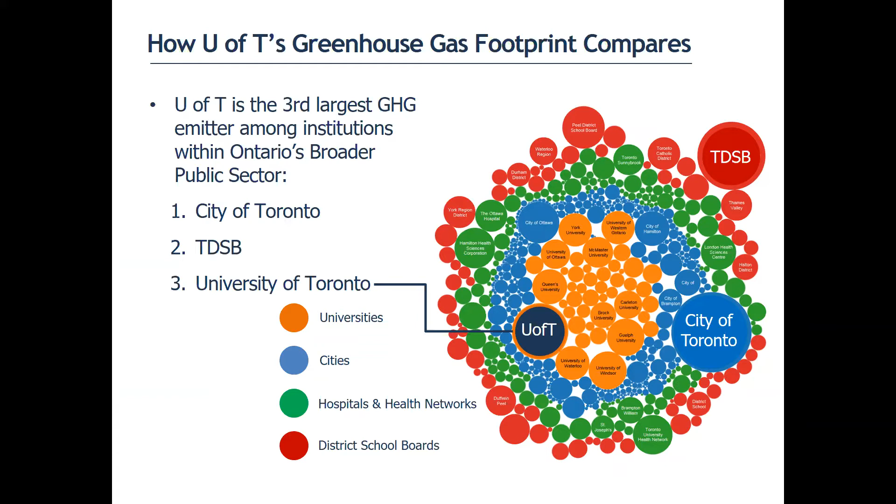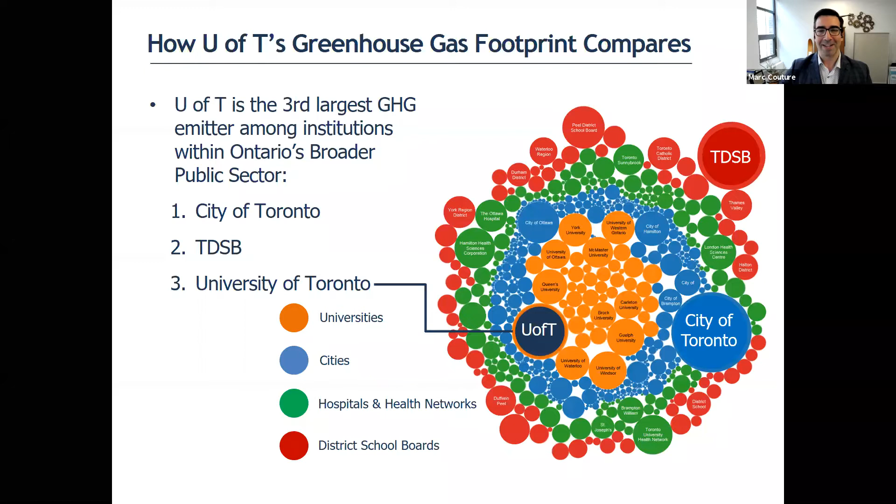In terms of our carbon footprint, the U of T is the 3rd largest GHG emitter amongst institutional emitters within Ontario's broader public sector, which is sort of a dubious bronze medal for us, and we're trying to very actively hand over that bronze medal to someone else. When you compare the U of T's greenhouse gas footprint, our reduction target by 2030 of 59,000 tons alone is larger than the total annual emissions of any other Ontario university. So I think that's important for context.

And while we are efficient and we strive to be even more efficient, we still have a very significant footprint due to our scale. We emit more than many local auto manufacturing plants and other industry players. If you see here, we have Sanofi, Honda, Toronto Pearson Airport, Ford, GM, Toyota, and you see us at the bottom.

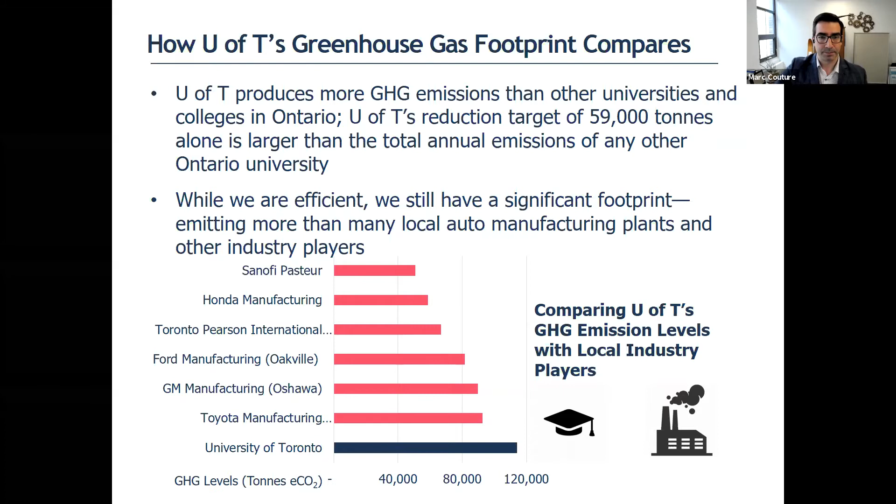We've set a commitment at U of T to reduce our GHG emissions by a minimum of 37% by 2030, and this is based on a 1990 GHG baseline. I think that 1990 level is important, and I'll circle back to that in a minute. We're also part of the University Climate Change Coalition through Second Nature. We joined in 2018, along with 19 other universities in North America that have made the same commitment. Our low carbon action plan is a response from university operations to achieve our commitment on climate change.

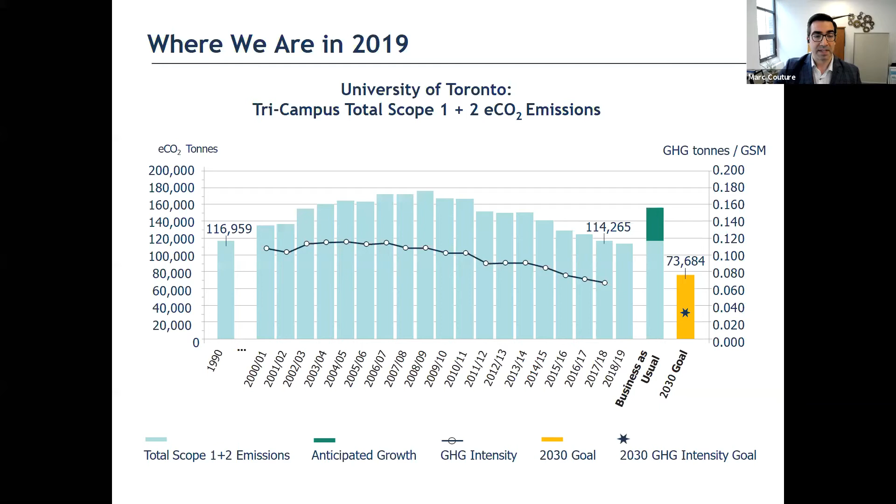Going back to our baseline here of 1990, the reason this is so significant is that our emissions actually rose quite a bit between 1990 and today. So if we were basing our baseline more on a 2005 or a 2010, this would reflect closer to a 65 to 70% reduction. And this is also for us, net of growth. So it does make a big difference for us referencing 1990.

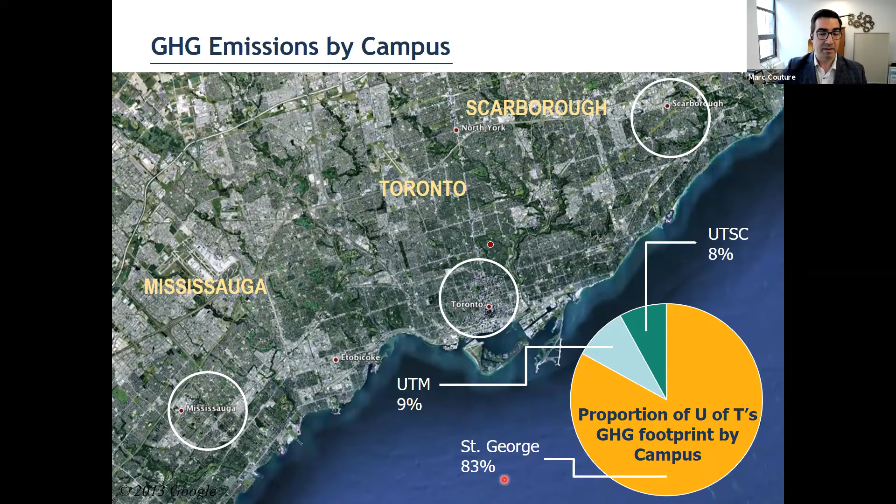To look at the bigger picture here, we have our 3 campuses: Mississauga, Scarborough, and St. George in downtown Toronto. You can see the relative proportions of the GHG footprint for each campus, with St. George taking the lion's share of those emissions at 83%.

Our low carbon action plan focuses on a strategy or framework where we're looking to tackle 3 buckets: production, distribution, as well as consumption on the demand side. And we follow several principles for this. The first principle, of course, is to focus on reduction, a conservation-first approach, because the cleanest and cheapest energy is the energy we do not consume.

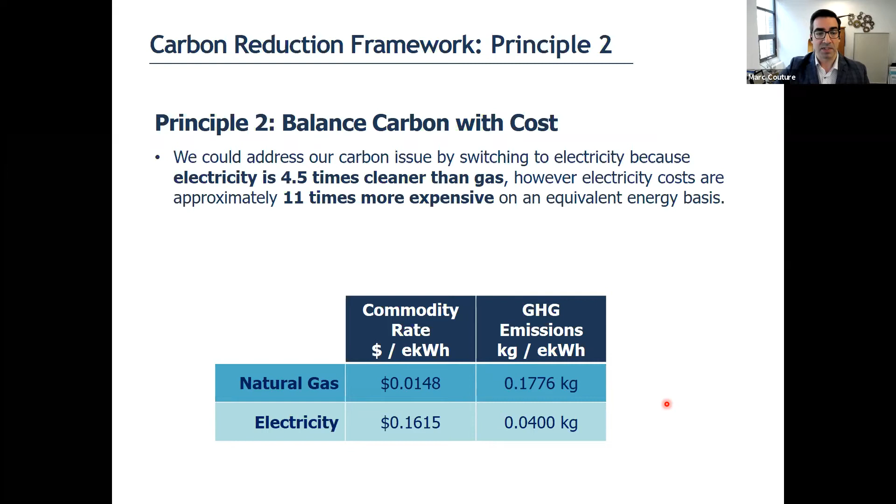Principle 2 is to balance carbon with cost. We could address our carbon issue largely by switching to electricity because it's 4.5 times cleaner than gas. However, with a Class B rate, it's actually 11 times more expensive. So this obviously has to be balanced in a responsible manner to decarbonize our campus.

Principle 3 is to also try and go beyond our own assets, to reach beyond our assets. Our district system supplies some of the federated colleges and also external clients, and approximately 12% of our emissions come from assets we do not directly own or influence. So we have to work collaboratively with these external partners to try and reduce our emissions overall.

We also, as Principle 4, want to foster innovative solutions. We definitely want to leverage the campus as a living lab model to foster partnerships with our academic community and achieve carbon reductions. We also want to develop external partnerships to implement innovative solutions to our carbon challenges.

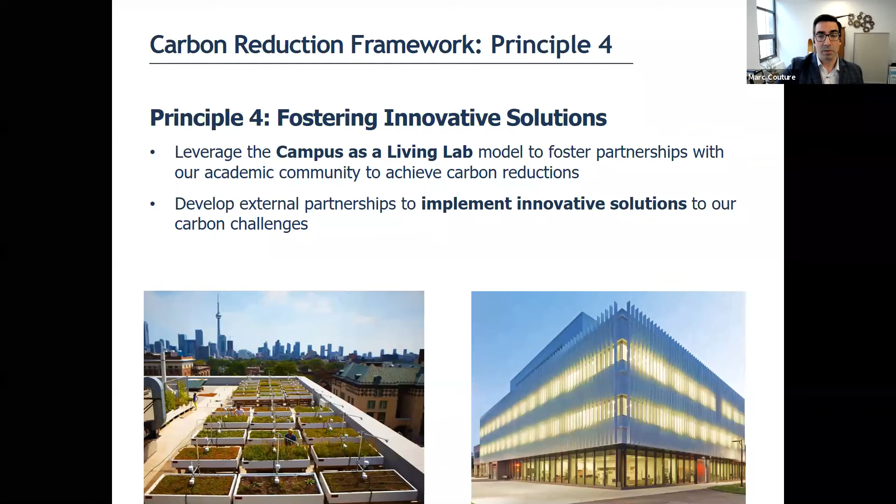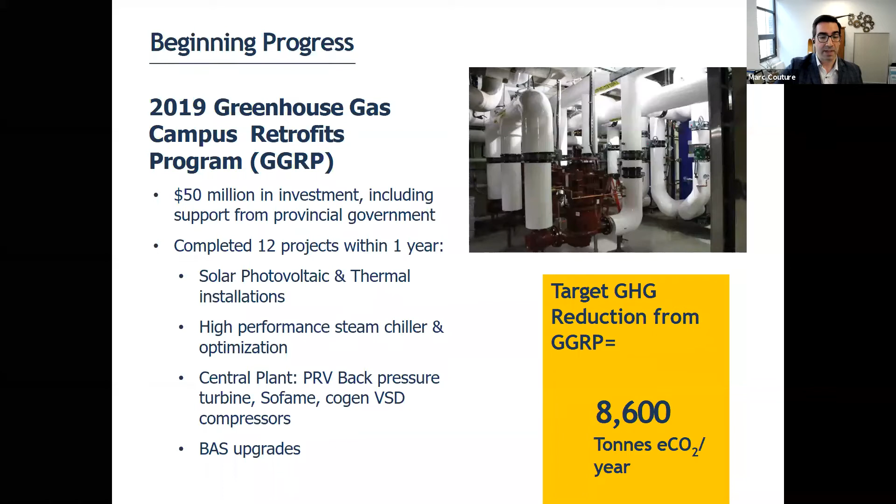If we look at our framework here, we'll start with the production end of things, and we'll see how we plan to achieve our targets.

The first project here is ongoing currently in King's College Circle in the heart of our front campus, our historic core. We're currently drilling over 350 boreholes to a depth of over 850 feet, and this will help us achieve a reduction in our GHG emissions as it supports the energy from our central heating plant.

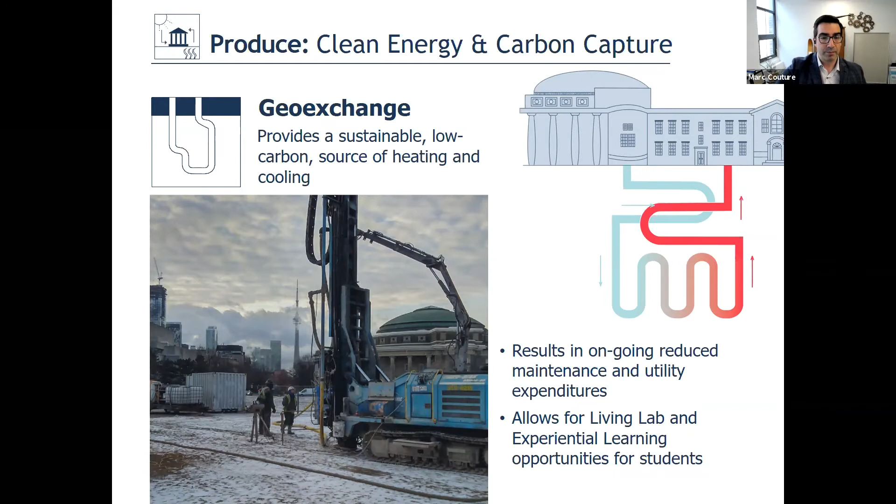We're doing geothermal on all 3 campuses. The King's College Circle example I just spoke about is targeting a 15,000 ton reduction, while geothermal at the other 2 campuses, UTM and UTSC, combined give us a total of 16,465 metric tons of reduction annually.

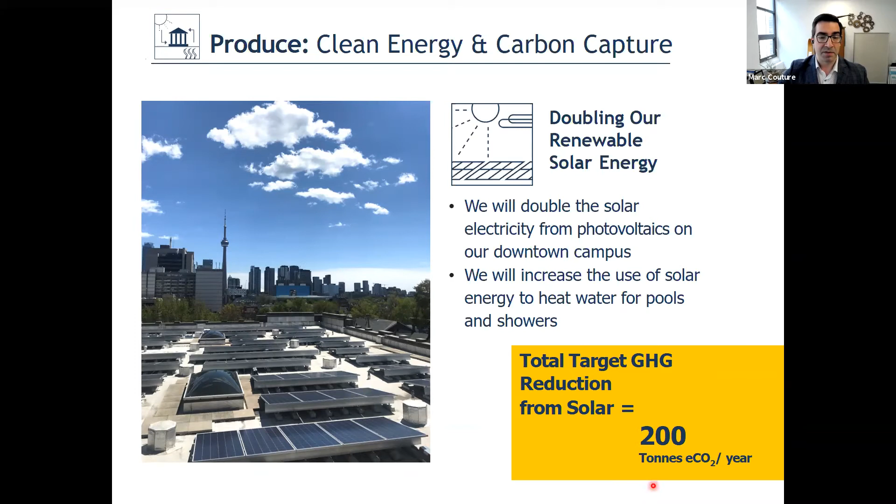Also under the production category, we're aiming to double our renewable solar energy on our St. George campus, as well as the Mississauga and Scarborough campuses. While reducing electrical consumption doesn't have as huge of a GHG impact, this will still give us a minimum of 200 tons annually and support our goals towards renewable energy.

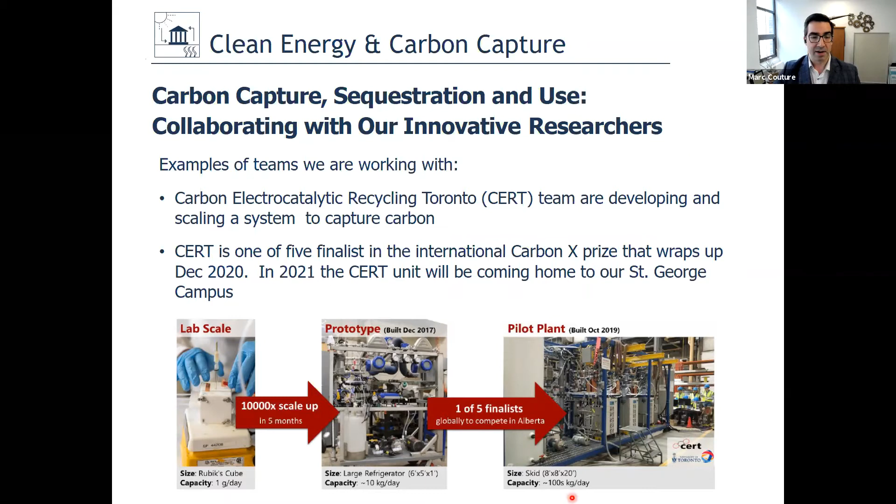Another innovative solution is that we're looking to collaborate with our campus innovators on carbon capture and sequestration. We have a team called CERT, led by Professor David Sinton and Ted Sargent, and they've been competing in the Carbon X Prize. They've successfully gone from lab scale up to a prototype scale, and we're one of the 5 finalists as part of the Carbon X Prize. They're just returning home to the U of T campus now with their skid, and we hope to implement this even at a larger scale as part of our decarbonization efforts.

If we look to the second category here in terms of distribution, we're looking to leverage our 100-year-old district energy system and target specific improvements to try and reduce emissions further by about 2,200 tons per year.

Our central plant is a key piece of this because it does distribute and provide heating to over 80% of our campus, and also over 20% of our electricity needs. So tackling the central plant efficiency is key to our strategy here.

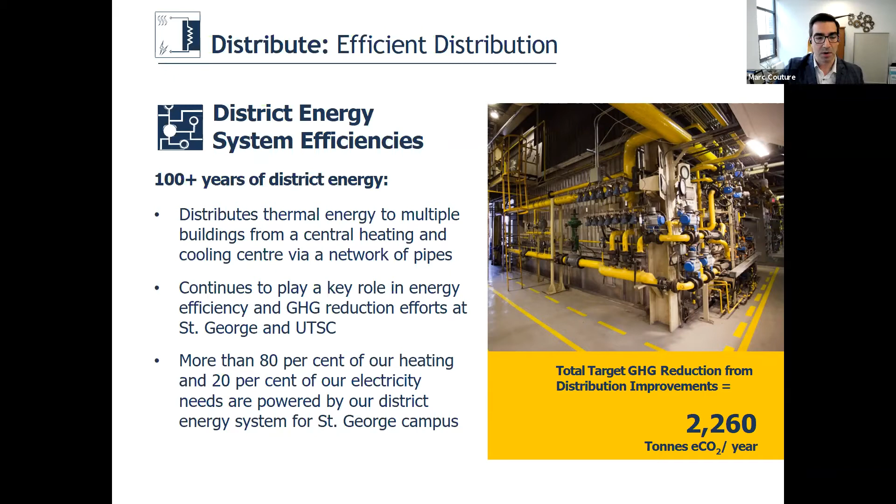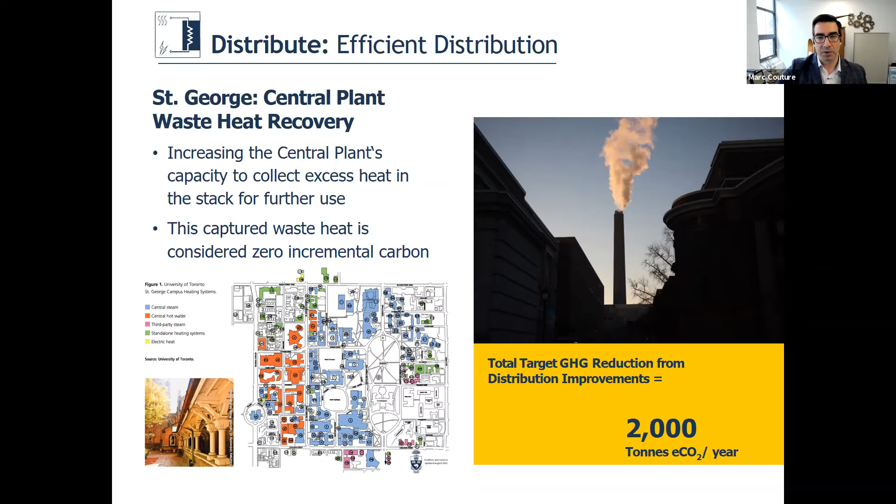One of the pieces here is the central plant waste heat recovery. We want to increase the capacity and the amount of waste heat that we can recover from our central plant and distribute this to adjacent buildings that can consume low temperature hot water. This component here should give us roughly 2,000 tons.

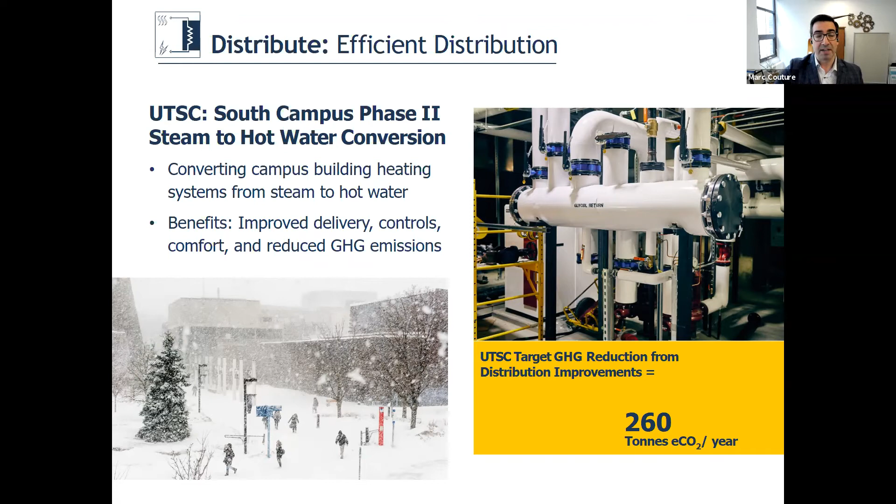At UTSC South Campus Phase 2, they're doing a steam to hot water conversion, converting campus buildings from steam to hot water. Benefits here obviously include improved delivery, controls, comfort, and reduced GHG emissions. They're hoping to achieve 260 tons per year with some of these steam to hot water conversions.

When we look at the consumption side, this is really your demand side or your building side, and it is critical as part of our overall plan.

Here you can see for the St. George campus, we look at the GHG intensity of our buildings. Right now we're at an average of 69 kilograms CO2 per square meter as an annual average, but to achieve our target, we really need to be at 32 or lower. So we're looking at more than halving this intensity right now.

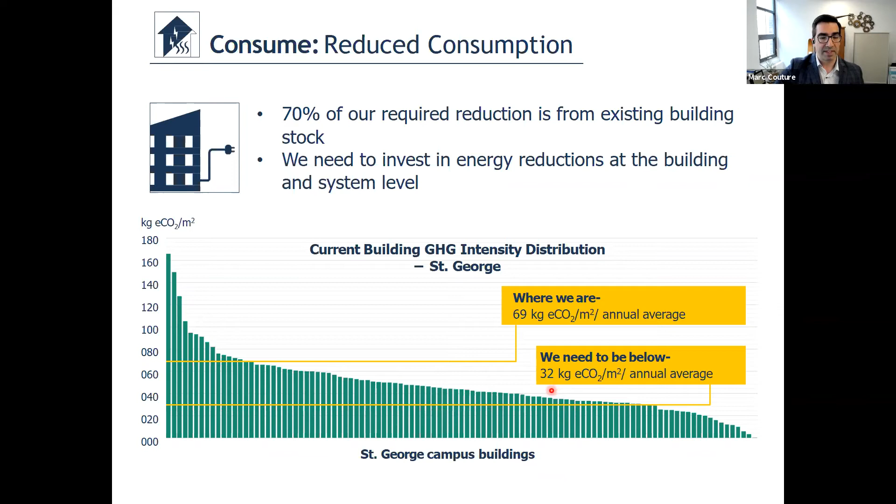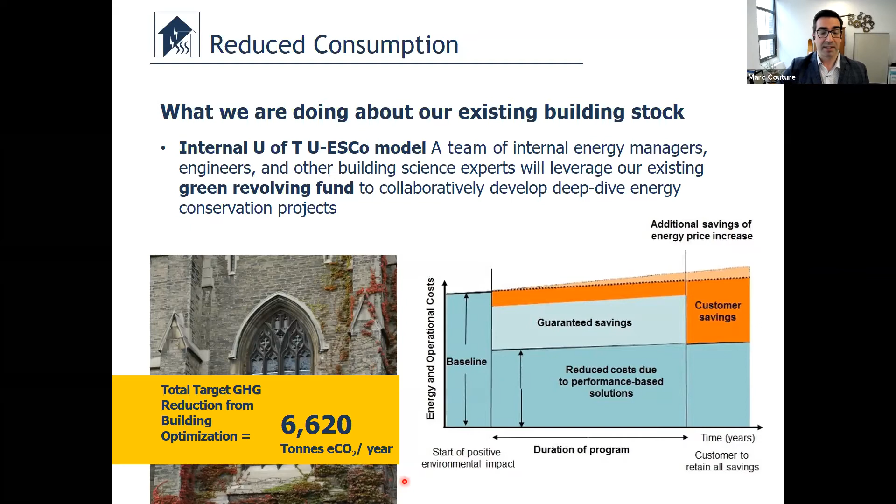One of the ways we're planning on achieving this is through our deep energy retrofit program. Internally, we have a group called the U-ESCo team, comprised of people from my office of sustainability, the operations and utility folks, finance, as well as property management. We're working collaboratively to identify deep energy retrofit projects, which can be funded in part by our revolving fund, as well as through our deferred maintenance budgets, to really affect deep transformational change. Through this program, we're looking to achieve a minimum of 6,600 tons of reduction annually.

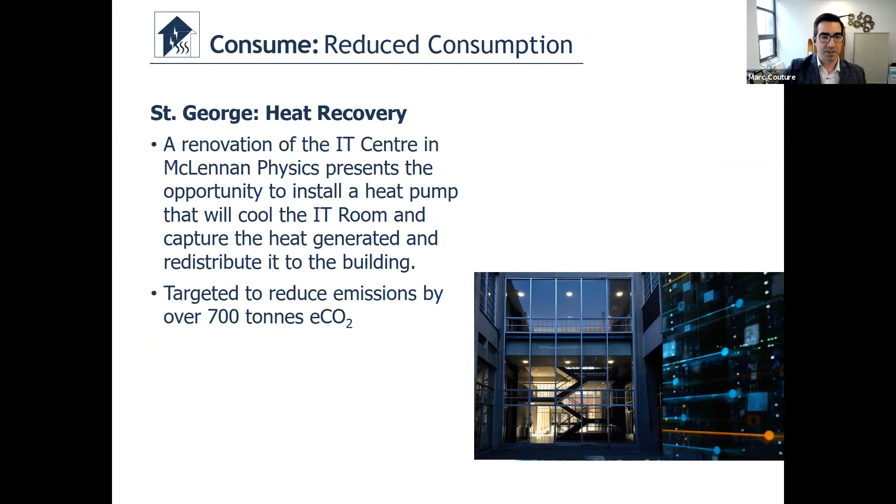On the demand side, we're also looking at opportunities for internal heat recovery. We have a project at our McLennan Physics building where we're going to use a heat pump to capture the heat generated by an IT data center and use that to offset heating requirements for the overall building. We're calling this our computational boiler, targeted to reduce emissions by 700 tons annually.

Another key pillar in our strategy is our new performance standards, launched in fall 2019. We're mirroring the Toronto Green Standard requirements for building performance with our own version internally at U of T, combining best practices from a number of standards and codes, including LEED, the TGS, the WELL standard, and different ASHRAE standards.

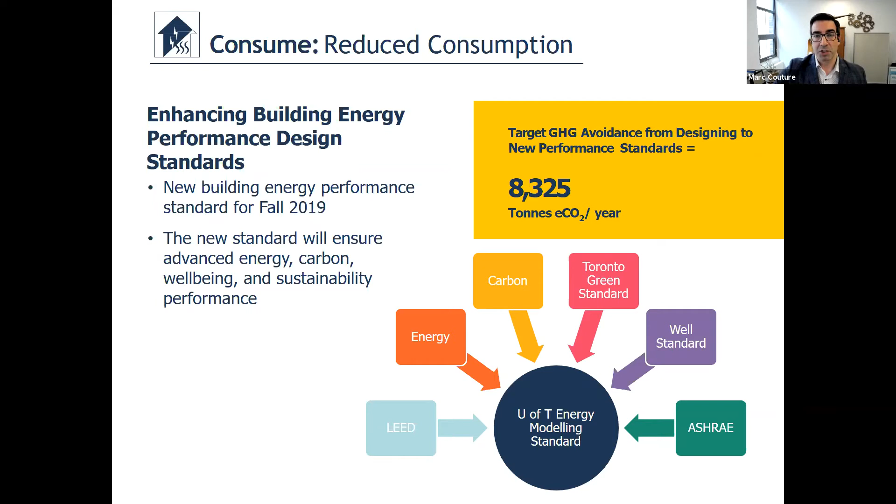We're essentially requiring all new construction, major renovations, and minor renovations on our campus to meet a very stringent target in terms of overall energy use intensity, GHG intensity, and thermal energy intensity. This will go a long way toward mitigating the impacts of growth on our campuses, and ensuring every dollar spent through deferred maintenance and operational budgets is aligned with our long-term vision and targets.

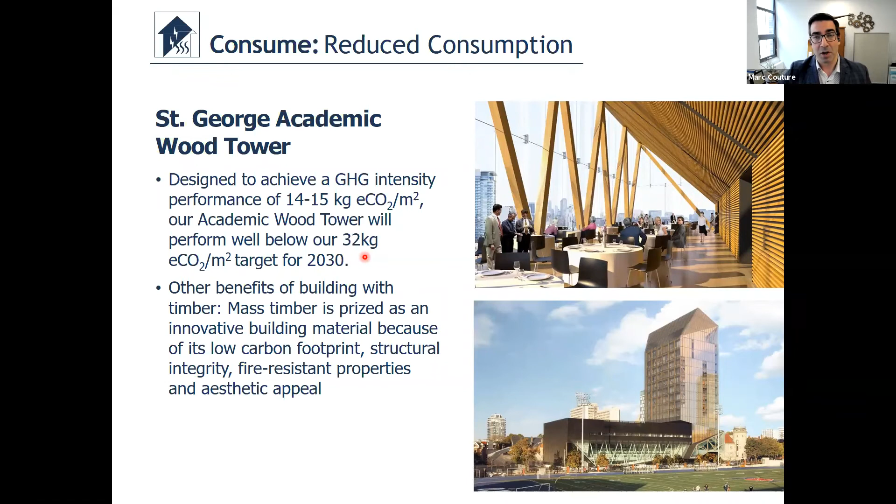Another example is our St. George Academic Wood Tower. This is designed to achieve a GHG intensity performance of between 14 and 15 kilograms per square meter. Recall we were looking to be well below our 32 kilograms. This is another example of how our performance standards help mitigate the impacts of growth.

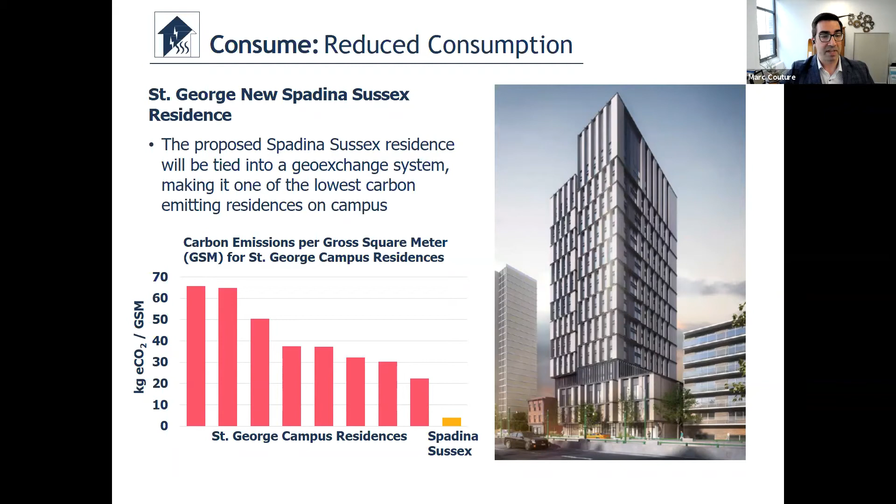Another example of demand side work is lighting conversion. We currently have one project tackling LED lighting conversions. Lighting is one of those things where as soon as you've done a conversion, there's new technology and you can start all over again, specifically because these projects typically have very low paybacks, making them very attractive for reducing energy consumption as well as GHG emissions.

We're currently replacing roughly 35,000 lights on campus to LED as part of phase one, which is ongoing, and hoping to launch a phase two to replace even more bulbs, for a combined replacement of over 75,000 bulbs from now till September. The result should be a minimum of 1,000 tons reduction per year.

Carbon stock and sequestration: U of T properties including St. George, UTM, UTSC, Hart House Farm, and Koffler Scientific Reserve at Jokers Hill and Gull Lake have a significant number of forests and trees that have been capturing and storing carbon for decades. We're doing research to calculate the number of trees and the capacity for sequestration, and hope to deploy active forest management to generate a net reduction of close to 1,100 tons per year.

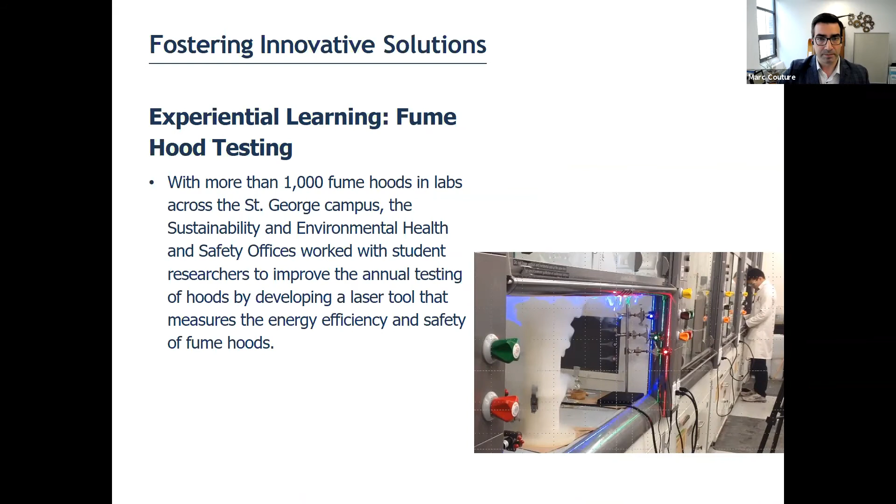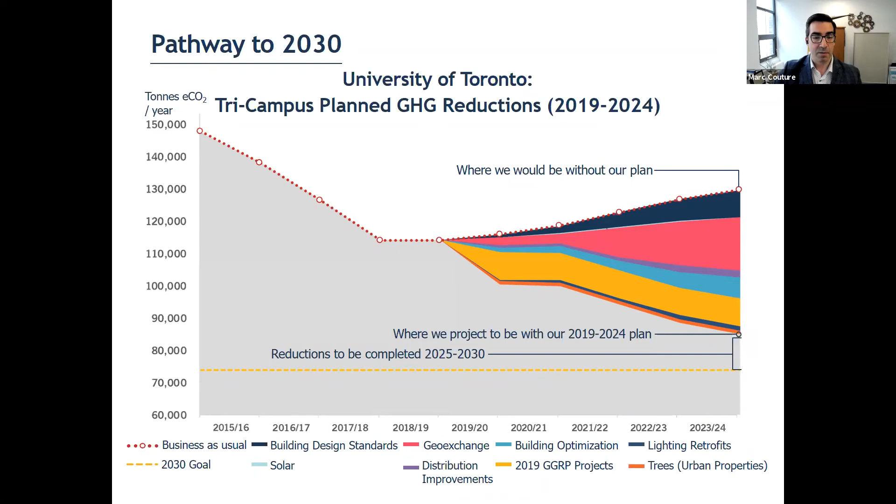If we look at our pathway to 2030 at a glance, you can see that design standards play a big piece in mitigating growth, because this was where our growth would be without the standards, so it substantially mitigates the impacts of growth. Our geo exchange, shown here in pink, will have a big impact as well, providing a 15,000 ton reduction at St. George. And if you look at the rest here, the GGRP project we just finished, and building optimization, you can see how we plan to get to our overall 45,000 ton reduction.

Another really significant piece to this is how we're measuring our carbon reduction. We've made a commitment to reduce 80% by 2050, but this is absolute - net of growth, and without using any offsets. The last 20% will be U of T owned offsite generation for renewables, not third-party offsets. This is a little different than how some of our peers are doing it.

I think this does make it quite challenging, also in light of the fact that we're looking at probably about 90% campus growth from now till 2050. So those performance standards are going to come in, and be very much a key piece towards 2050.

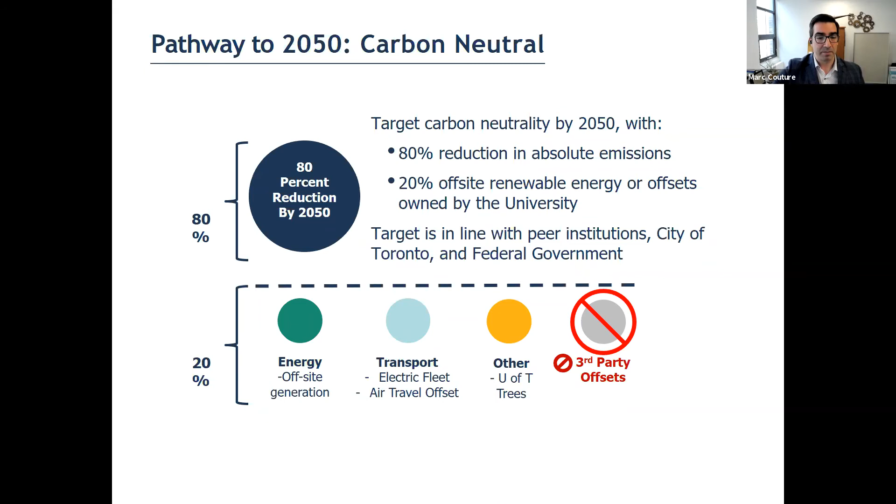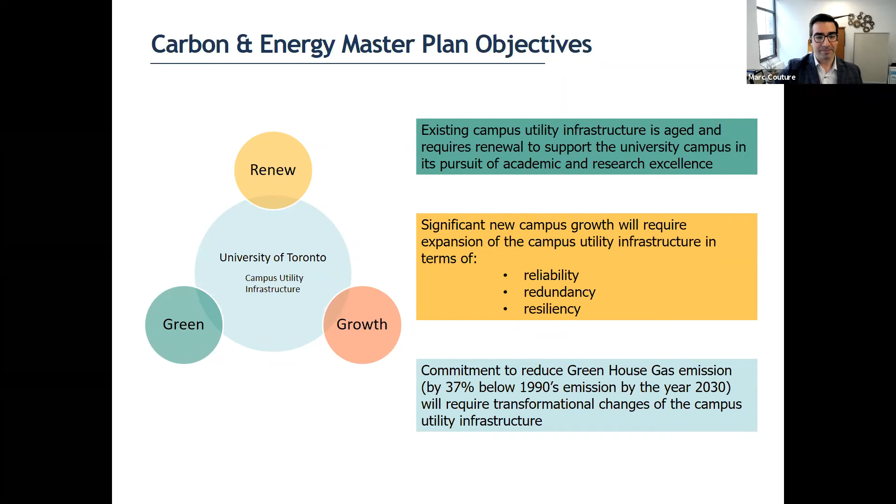That's all I have for you this afternoon.

Perfect, thank you so much Marc, and Mike, we'll invite you back to join us for the question and answer period now. Marc, I have to say watching your slide presentation, there are some really good looking buildings at U of T. I can't wait to get back to the city to come check them out in person and do some Instagramming.